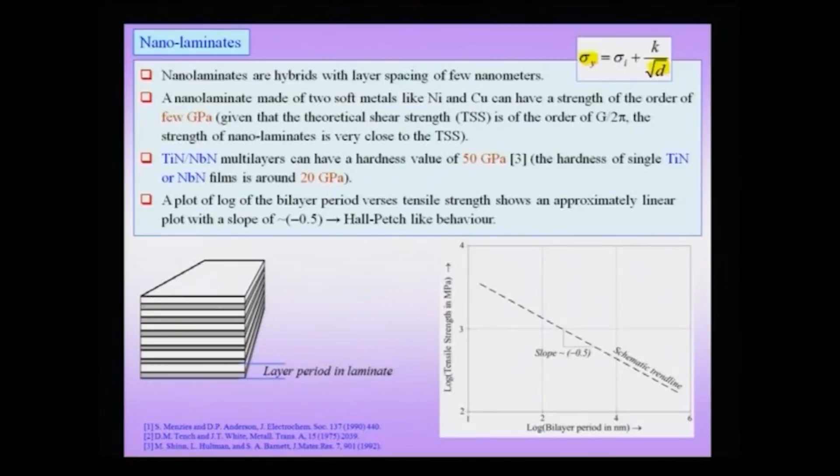One of the common models used to understand this Hall-Petch effect is known as the dislocation pile-up model. We had also noted that though this is a popular model, electron microscopic evidence is often not available in support of it, even though this kind of behavior is seen in a wide class of materials across large variations in grain size.

But we had also noted that when we go down to very small grain sizes, the Hall-Petch relationship breaks down, which is expected. We noted that below about 20 nanometer grain size, there could be a regime of altered strengthening with decreasing grain size. We could have no strengthening with decreasing grain size, or we could have what you might call an inverse Hall-Petch effect, which is an entirely new concept, especially relevant for nanocrystalline materials.

Now we will consider a hybrid, and explore the applicability of the Hall-Petch relationship in nanolaminates and particulate composites. Nanolaminates are hybrids with layer spacing of a few nanometers.

A schematic is shown below, in which you have two materials, and in the example considered, one material could be nickel, another could be copper. Of course, you could take a wide variety of materials. For instance, you could have a germanium layer followed by a germanium silicon solid solution layer, or a gallium arsenide layer and an indium gallium arsenide layer. Anyhow, you can form a bilayer, which is basically a 2D nanocrystal, and you can stack them one on top of the other to obtain a laminate structure.

The two layers could be coherent with each other, incoherent, or semi-coherent, and in the process you have a periodicity in the z direction. So this is my z direction. The important point to note is that this is my layer period, that is, this is my unit cell parameter along the z direction.

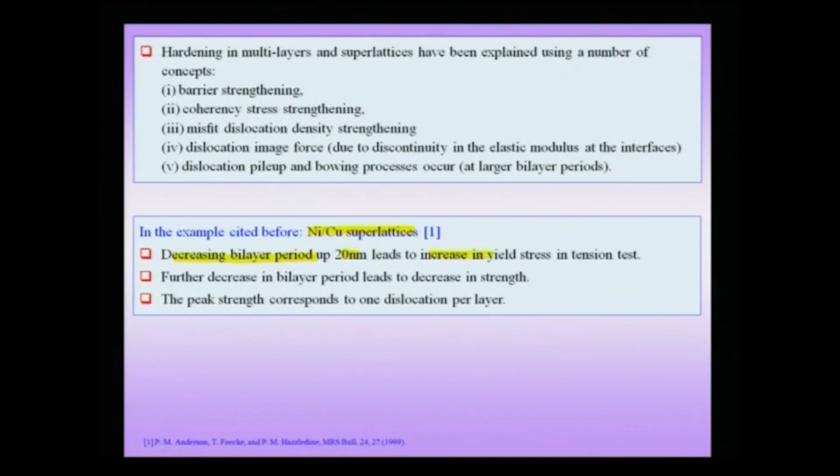This is a very interesting effect. If you dwell deeper on these nickel copper superlattices, you would notice that a decreasing bilayer period up to about 20 nanometers leads to an increase in the yield stress in the tension test. Further decrease in bilayer period leads to a decrease in strength. The peak strength corresponds to about one dislocation per layer.

So this linear trend is followed in a certain regime, as I pointed out, and would not be followed at a very small period. But the interesting thing is that the peak strength corresponds to about one dislocation per layer, and we will soon see what mechanism has been attributed to this kind of strengthening.

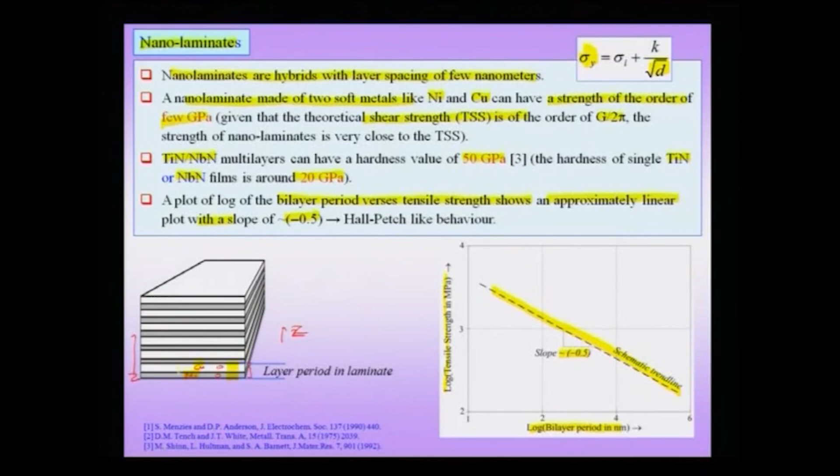To summarize this slide, we can not only have nanoscale materials, but nano hybrids, in which case the two components forming the composite or hybrid structure are both on the nanoscale. In this case, the individual layers of nickel and copper are on the nanoscale, and this kind of nano laminate shows very high strength even though it may be made of soft materials like nickel and copper, approaching almost the theoretical shear strength of the material.

That means the yield stress could be of the order of gigapascals, and additionally you also observe Hall-Petch kind of behavior in a certain grain size or bilayer period regime. Now, the hardening in such multilayers and superlattices has been explained using a number of concepts.

We just list them here, we do not go into the details of some of these, because some are still debated as to which is the correct or dominant mechanism in one kind of system versus the correct mechanism in another system. But we list some of these and may make a few additional comments.

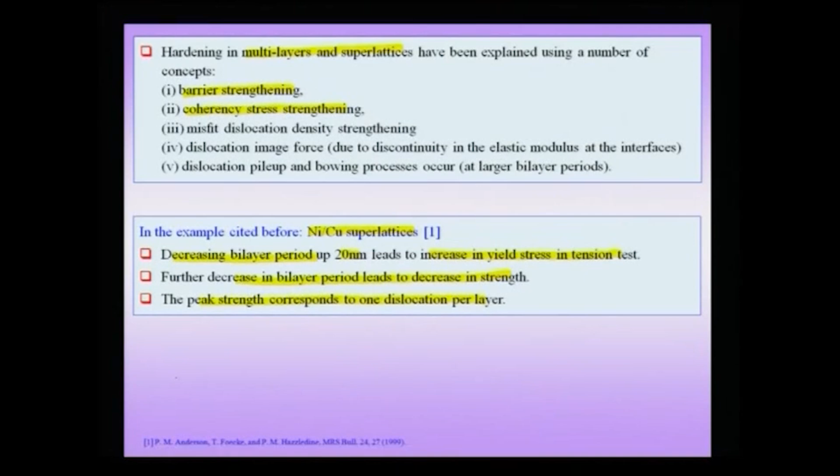They talk about increased barrier strengthening, which gives rise to this kind of extraordinary strength at the nanoscale. There is expected to be some kind of coherency between the two layers. Suppose I am talking about two layers, this is my layer A and this is my layer B.

So it is expected that this interface between layer A and layer B could be a coherent interface. That means there is an epitaxial relationship between the A and B layers, which gives rise to certain coherency stresses, and these coherency stresses are going to modify your local stress state, which is coming from an externally applied shear stress or a tensile stress.

It is also assumed that if this bilayer period becomes large, and if you start with what you might call a coherent system, then it will no longer remain coherent for large thickness, and in fact you may obtain misfit dislocations decorating the interface. So typically you could have certain decoration of misfit dislocations along the interfaces, which implies that the system is partially coherent, and this misfit dislocation would impede the motion, and this misfit dislocation, as we have noted before, is a structural dislocation.

It is not a statistically stored dislocation in the bulk of the crystal, and such a misfit dislocation would tend to give rise to certain hardening effect, which could attribute to the additional hardness of such a material in the nanoscale. Additionally, there is the concept of the dislocation image force, which we have encountered before, and this is due to the discontinuity in the elastic modulus at the interfaces.

A few words may be necessary here, because this is not the classical image force, because in the classical image force we have noted before that you have a free surface and there is a force which is an attractive force towards the free surface.

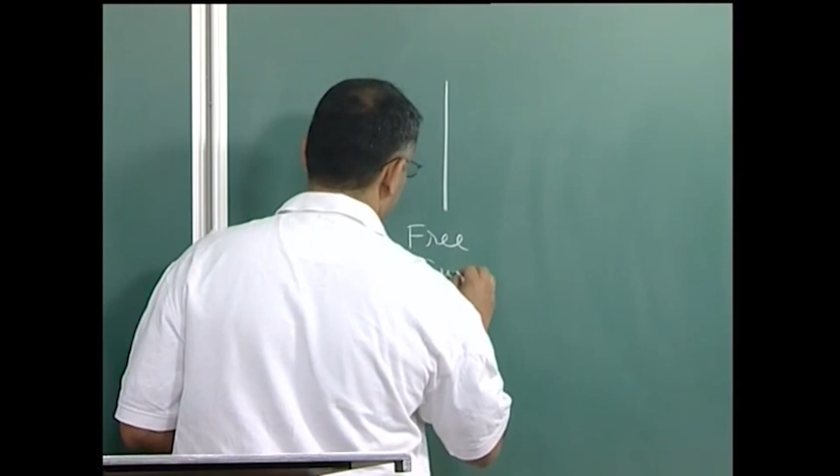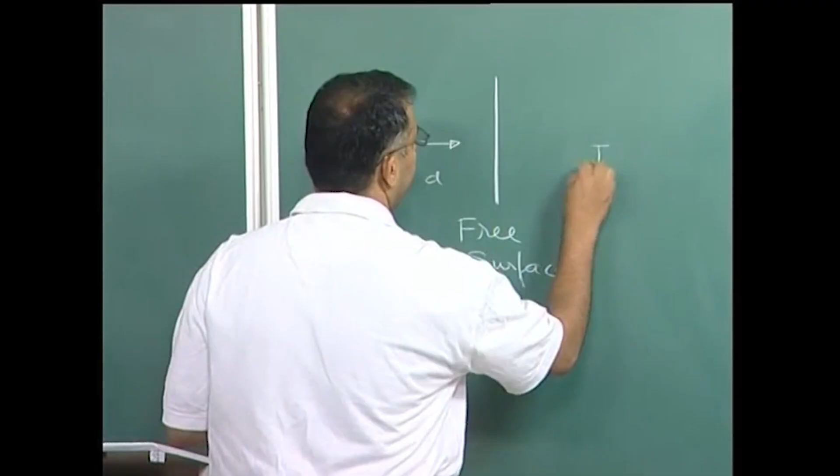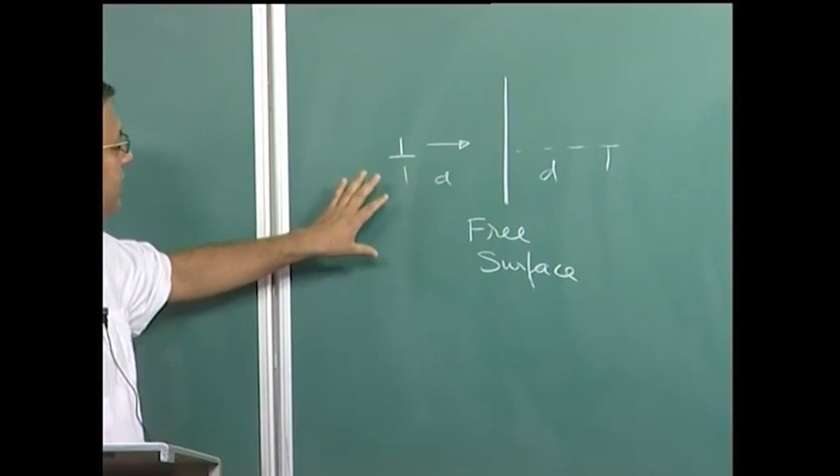Now, we can extend this concept of an image force. In this case, of course, I can make an image construction, and therefore, the attractive force between the two is called the image force, but I can extend this, and this kind of a force is called a configurational force, because this is coming not because of an individual mass particle being attracted to an individual mass particle, but because of the configuration of the entire system.

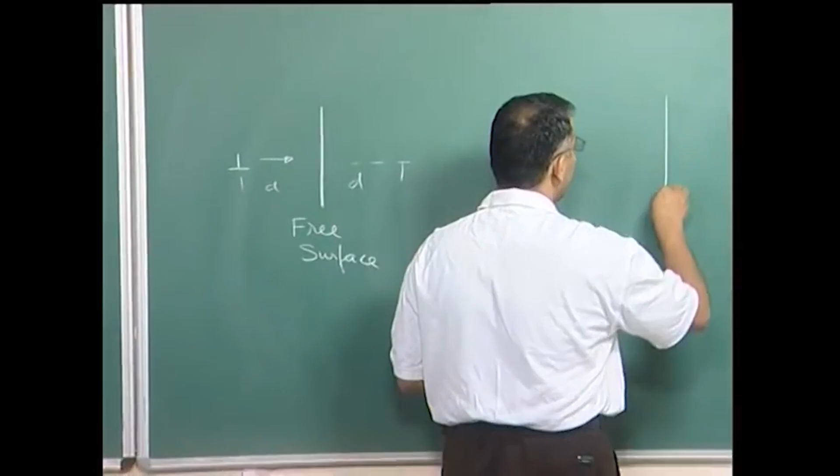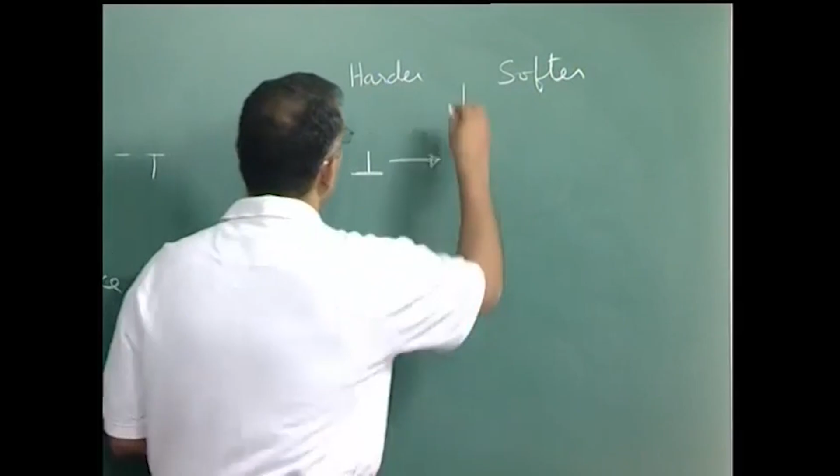And such a configurational force can also exist between, for instance, a harder material and a softer material. And if I put a dislocation in a harder material, it will be attracted towards the softer material, and here I am talking about elastically harder or softer.

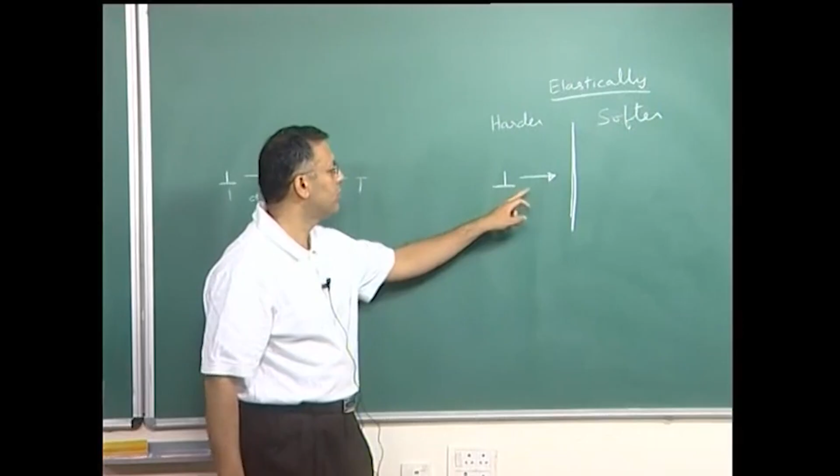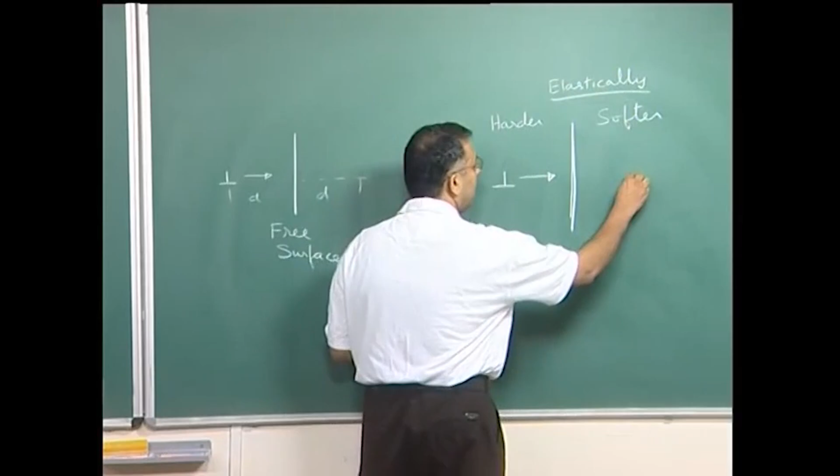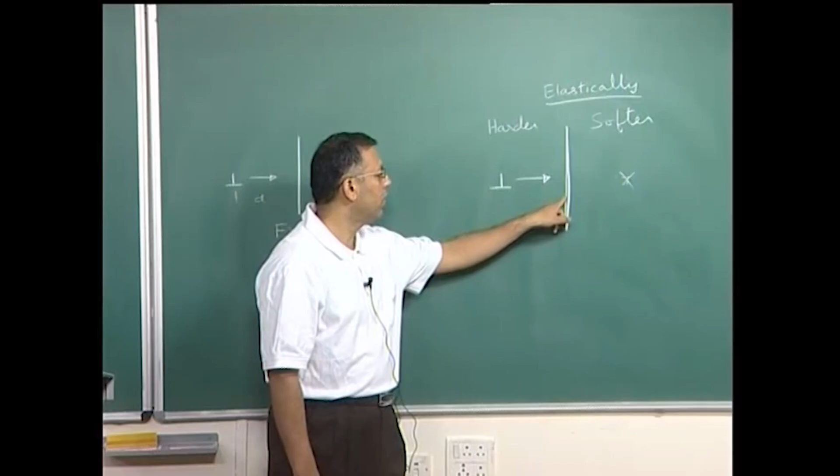So, if I have a harder material and the dislocation sits in the harder material and there is an interface with a softer material, then the dislocation may feel a force towards the softer material, and this kind of configurational force can loosely be called an image force, even though we should understand that actually now I cannot have an image construction, because this is not valid anymore, this is not a free surface, this is a softer material. Nevertheless, the dislocation will feel a configurational force towards a softer interface, because now the energy of the system would tend to decrease as the dislocation is positioned closer and closer to the softer material.

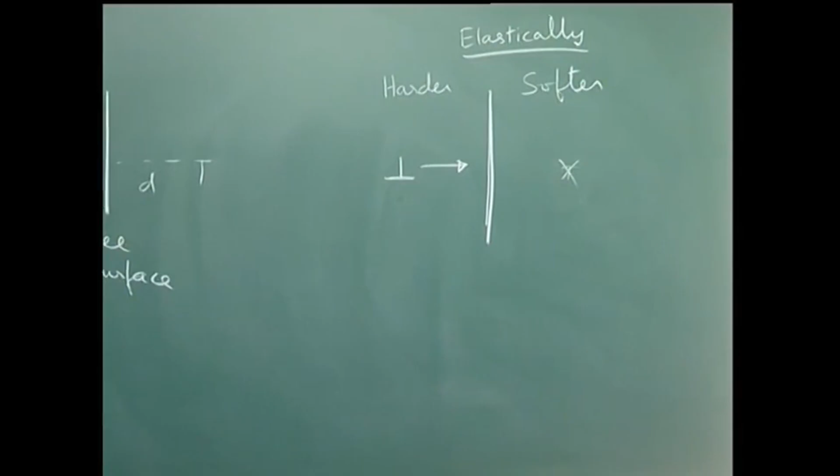That means that such kind of effects also seem to play an important role in the strengthening of these bilayers, and they have also been attributed to give some additional effect to the hardening, which is seen in these bilayers, which we have seen approaches almost the theoretical shear strength of the material.

And additionally, of course, some common mechanisms which are observed in the case of large grain size materials, like dislocation pileup and bowing of dislocation, which is like the Orowan bowing, are also observed, but now we have to note that this can only occur at larger bilayer periods.

That means that in smaller bilayer periods, we already noted that there is not enough space for a mechanism like a Frank-Read mechanism or an Orowan bowing mechanism to operate, and we have already seen that when you talk about a really small periodicity, then the whole region can only support one dislocation per layer. That means it is not possible to put multiple dislocations - of course, when I am talking about multiple dislocations, I am talking in the thickness direction.

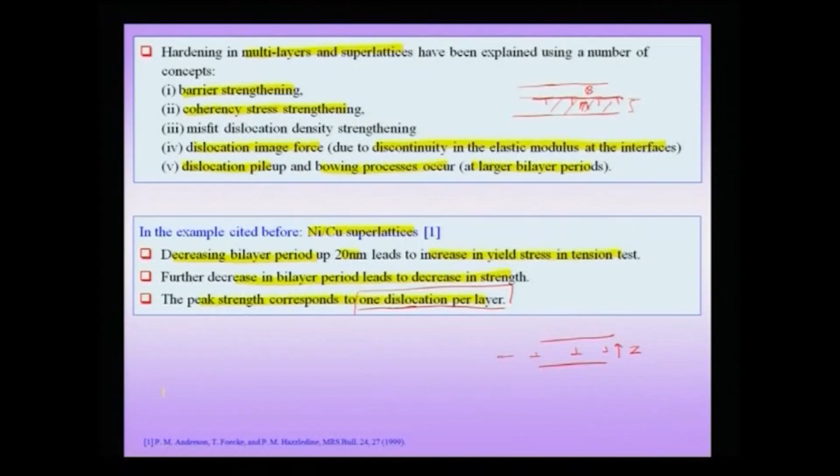So, there could be many dislocations, and I am schematically showing here in the direction of x or y, but in the z direction, which is perpendicular, or the direction of periodicity of the laminate, you do not expect more than one dislocation. And you could have even smaller sizes when the system becomes completely dislocation free - in other words, no dislocations are supported in the bulk of the two crystals which make up the superlattice.

So, we see that in nanolaminates we can obtain very high strength, and to understand this, we have to invoke a mechanism which is now thickness dependent, not independent of thickness. Therefore, if you go from larger bilayer periods to smaller bilayer periods, the mechanism may switch from a normal dislocation pileup or bowing mechanism to other kinds of mechanisms which are operative, like we just now saw, the image force mechanisms, etc., at very small bilayer periods.

Like we make a nanocomposite as a laminate composite, we can also make nanocomposites the usual way, which is the particulate nanocomposites. And herein also we see a lot of beneficial effects of putting nanoparticles in a bulk matrix. That means the relevant nano entity in this whole system is the reinforcement.

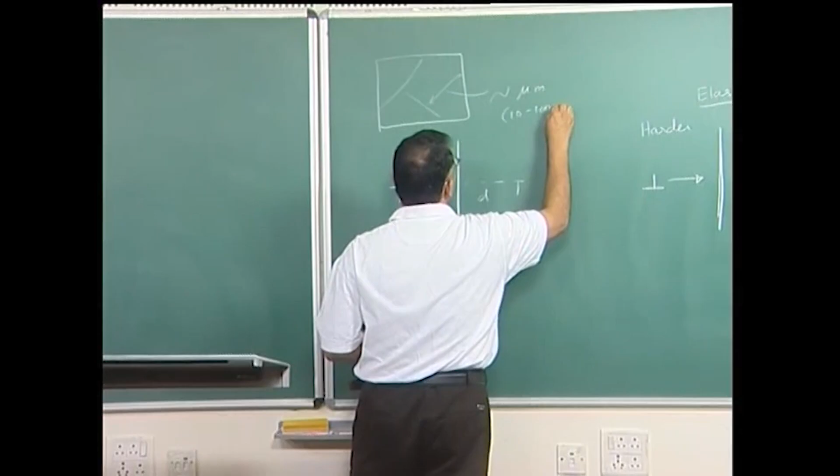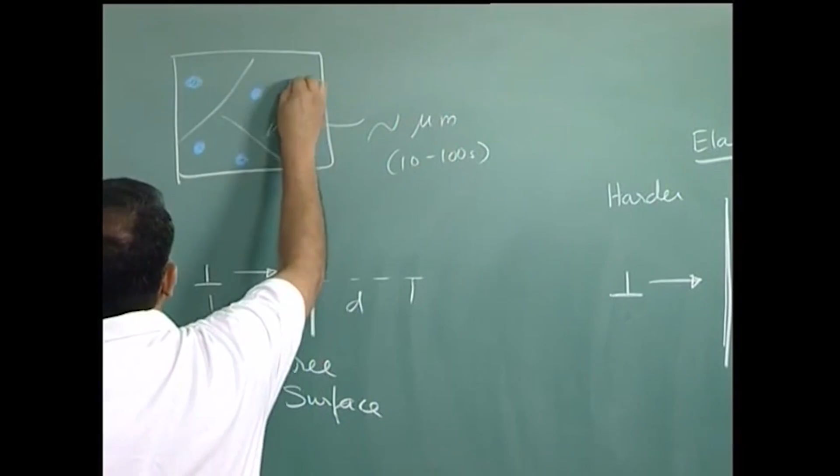That means I could actually have a polycrystalline material, and the grain size of this polycrystalline material could be in the micron scale, or tens or even hundreds of microns. That means this is not the relevant nanoscale dimension, but then I could put particles inside here which are used as reinforcement. For now I will draw schematically these particles as spherical, though there is no reason to believe they have to be spherical, and these particles could also be precipitates.

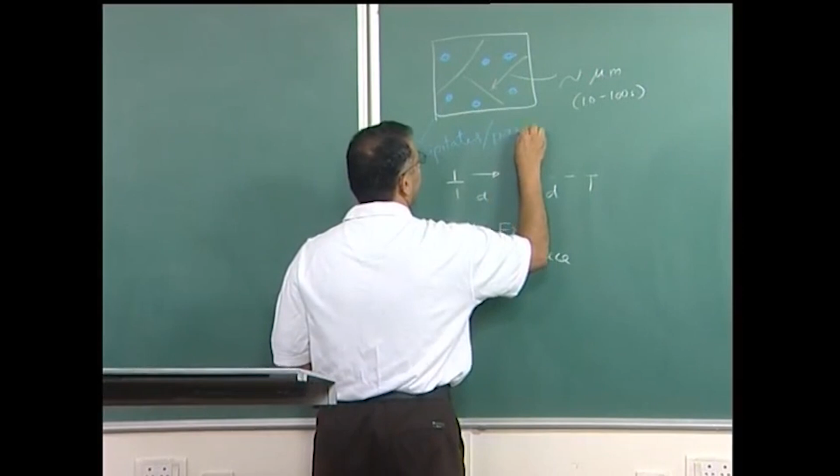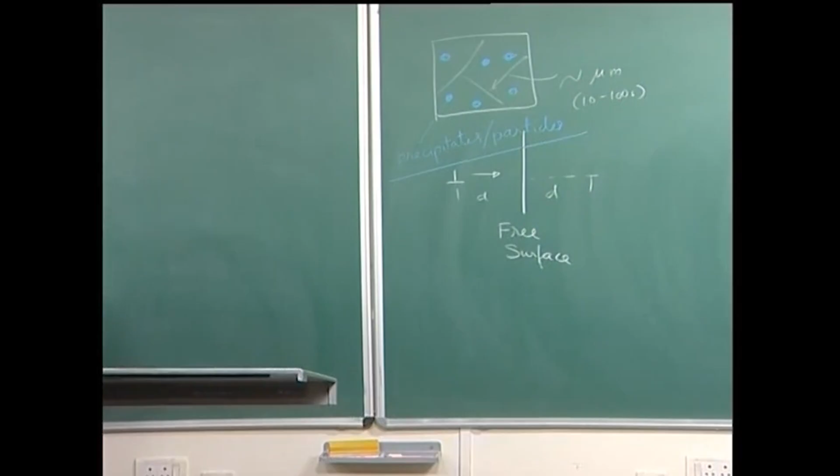This nanoscale dispersion of the second phase in a bulk first phase can actually give rise to a tremendous increase in strength, as shown in some of these examples here. We have already talked in detail about the precipitation hardening system, wherein you have precipitates of the scale of 1 to about 100 nanometers, and we will not repeat it here, but which is the case of duralumin, a precipitation hardening system.

But we will take up other examples like nano sized molybdenum in a volume fraction about 5 to 20%, which is from the usual small volume fraction to a reasonable volume fraction, when it is dispersed in a micrometer grain sized alumina. That means the grain size of alumina is no longer the nanoscale, it is only the molybdenum reinforcement which is in the nanoscale.

There is considerable improvement in hardness, fracture strength and toughness. So you see that the properties are overall enhanced by putting nano sized molybdenum in alumina, and you know that alumina is a ceramic, that means it is prone to brittle fracture and its fracture toughness is expected to be small. Therefore, there is a tremendous reason to add these kind of particles which will give you an increase in fracture strength and also an increase in toughness, toughness being the energy absorbed before fracture takes place.

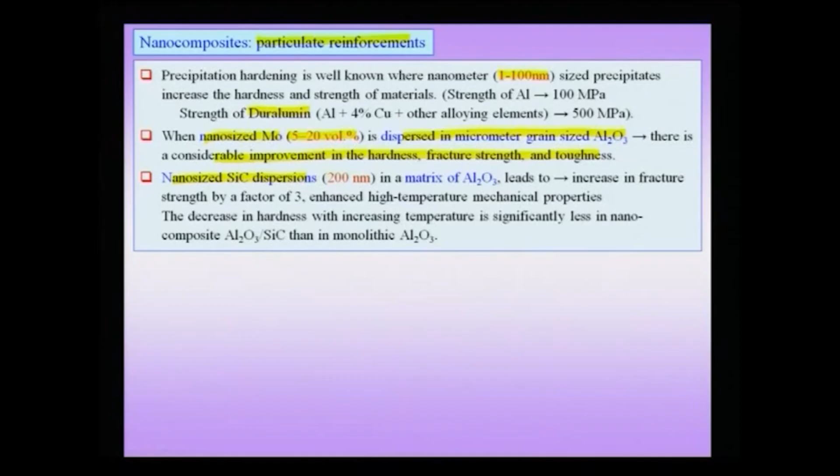Nano size silicon carbide dispersions, again we are talking about silicon carbide in the nanoscale of about 200 nanometers, in the same alumina matrix, also leads to an increase in fracture strength by a factor of 3. This is very important, because alumina, being a ceramic, being an oxide, is in a stable state. So it is resistant to some of those usual things which metals are not resistant to, like corrosion, etc., and it has a good elastic modulus as well.

But the problem with ceramics, as you know, is that they are very intolerant to cracks. In other words, they have a poor fracture toughness. So by adding silicon carbide dispersions in the nanoscale, you can get an increase in fracture strength of about a factor of 3, which is a pretty good increase.

The high temperature mechanical properties are also pretty good, and you know typically these ceramics find applications in high temperature, and this would be a good thing to add, actually, silicon carbide. The decrease in hardness with increasing temperature is what you expect, because now you can have thermally activated motion of dislocations. In other words, in normal alumina at room temperature, the strength is very high because dislocations are not that glissile, the Peierls stress is very large.

But then when you go to high temperature, some of these will start showing plasticity, because now you can have thermally activated slip, and also other mechanisms like grain boundary sliding may start to take place. Therefore, this softening effect is significantly reduced when you use an alumina silicon carbide composite rather than a monolithic alumina.

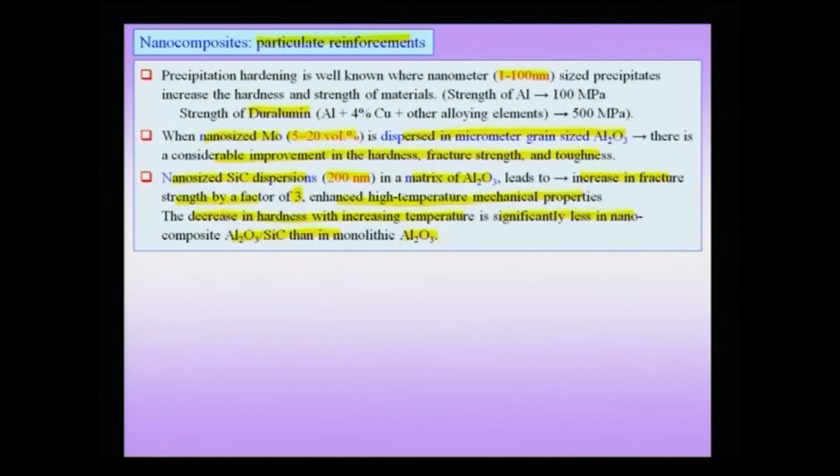That means you have benefits on all fronts: benefit in fracture toughness, benefits in high temperature strength, and also in the case of molybdenum in alumina, you actually have an increase in hardness and toughness as well. Therefore, it makes sense now to actually make some of these composites with reinforcements in the nanoscale.

And we have already seen one example wherein carbon nanotubes has been used for reinforcement of alumina, and we have seen that typically these are multi-wall carbon nanotubes, and by doing so you can actually get a benefit in strength there as well.

So, to summarize these slides, we have of course individual nanostructures which themselves show very good properties, but then we also have composites and hybrids wherein at least one relevant entity is in the nanoscale, which can also give us improvement in the properties.

Next, we take up the issue of creep in nanomaterials. We had earlier talked about creep as a general phenomenon, and we had also talked about various kinds of creep mechanisms, and issues which will be highlighted when we go down to the nanoscale. We said that some of these mechanisms, like diffusional mechanisms and issues like climb, when you go to nanoscale, all these effects will be enhanced, and therefore you would expect creep rates to be high.

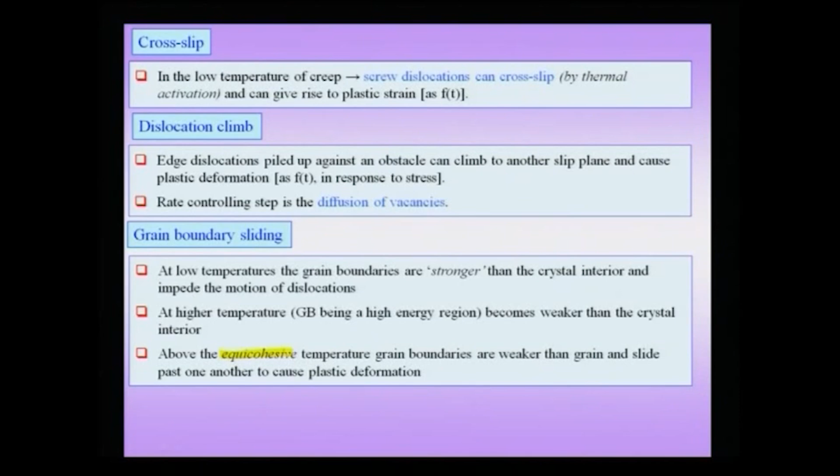Additionally, one of the important mechanisms of creep is grain boundary sliding, and we noted that for grain boundary sliding, in some sense we have to cross the equicohesive temperature. Decreasing the grain size in some sense is like increasing the temperature, and therefore even at low temperature we would expect an increased creep rate. That means we noted that we would expect in nanomaterials high creep rates, and that too at lower temperature. So this is what we had expected, we had anticipated.

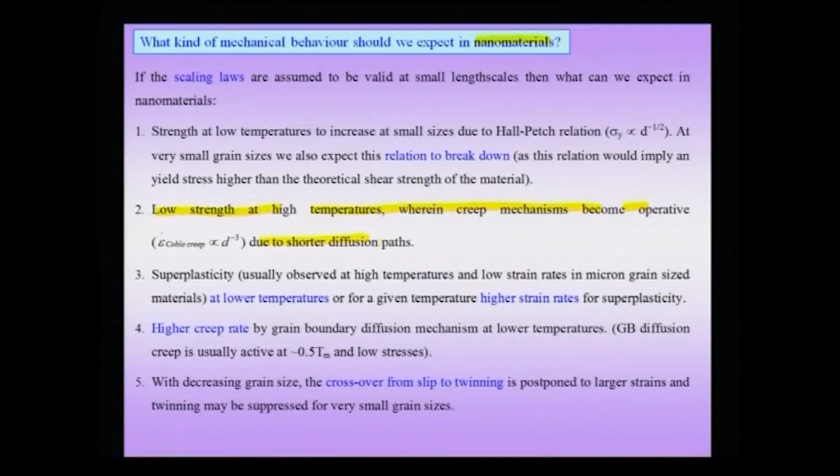Now we will actually see how much of this is actually true when talking about creep of nanomaterials. We will see that in some systems we do see what our expectations were, but in many other systems we not only do not see what our expectations were, but we can even see effects opposite to what we had expected.

If you talk about two important systems like nanocrystalline palladium and copper, which have been pretty well investigated, you can clearly see in these cases the grain size is of the order of 40 or 20 nanometers, which is extremely small. In this system there seemed to be no increase in creep rate as compared to the micron sized counterparts. So this is pretty startling, that we did expect increased creep rate when you go down to nano sizes, but there was no increased creep rate.

Of course, when comparing nano and micron sized grain, we are using the same temperature for the comparisons. And more surprisingly, in some temperature regimes, even a lower creep rate was observed in the case of palladium. So this is in direct contradiction of our expectations, wherein we thought there is going to be enhanced creep rate, and therefore this is extremely surprising in the case of nanocrystalline materials and the creep behavior.

Studies on copper involved a small distribution of grain size, 10 to 25 nanometers, and palladium about 35 to 55 nanometers, where 40 nanometers can be thought of as an average in that regime. That means, at the heart of the mechanisms, we have to keep in mind that though there might be an average grain size reported in literature, there is always a spread in grain sizes, and the more statistical data we get, the better we find out the true distribution of grain size.

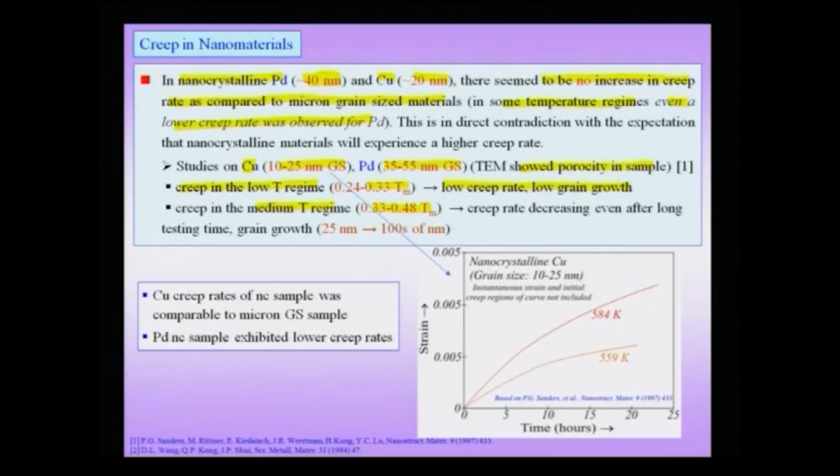The creep study was done in two temperature regimes: one in the low temperature regime of about 0.24 to 0.33 Tm, and one in the medium temperature regime, about 0.33 to 0.5 Tm. In the low temperature case, there was low creep rate and low grain growth. In the medium temperature regime, the creep rate was decreasing even after a long testing time, and more importantly, there was grain growth. That means if I have grain growth, I am essentially changing the microstructure of the sample.

Here we are not talking about a small grain growth, we are talking about a grain growth wherein the grain size increased by a factor of 4 or more, and this is the average grain size, which implies that the microstructure is continuously changing. Maybe there is also porosity in the sample which is increasing, and therefore it is difficult to characterize creep in many nanocrystalline materials, because I cannot understand if this decreased creep rate is occurring because of the nanocrystalline effect, or because of the increase in grain size taking place during testing.

These are very serious issues associated with creep testing in materials, since we often see porosity, often we see a lot of grain growth, and therefore it is difficult to separate out the effect coming purely from the nano sized grains versus the changing structural parameters as the test is being conducted.

Below is shown, for instance, the studies on this copper material, which has a grain size in the range of about 10 to 25 nanometers, and in this plot we have the instantaneous strain, which is the elastic strain, initially removed, and the initial creep regions of the curve are also excluded.

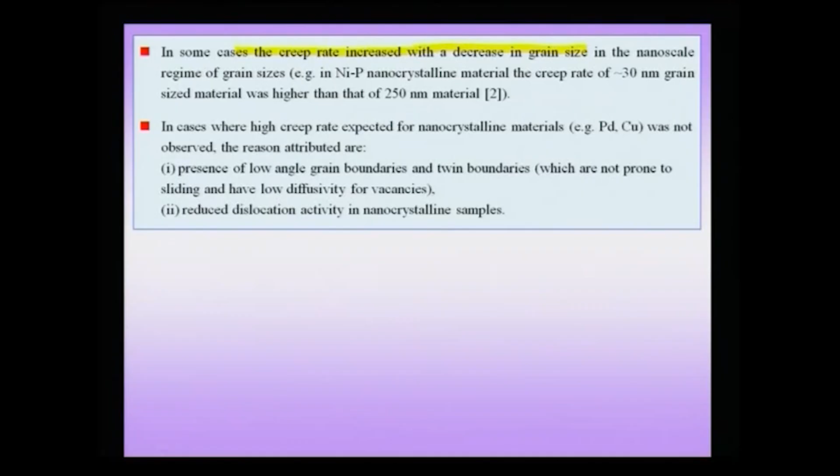This was an alloy of nickel and phosphorus. The creep rate of the 30 nanometer grain size material was higher than the 250 nanometer grain size material. That means, by decreasing the grain size—both grain sizes being in the nanoscale, one 250 nanometers and one 30 nanometers—there is an increase in the creep rate. So we have seen that all three possibilities exist on reduction of the grain size.

Of course, the comparisons are slightly different, because in the first case, for copper, we had compared the nano grain size with a micron grain size sample. Here we are comparing two nanometer grain size samples, and we see that there is actually an increase in creep rate as we decrease the grain size.

In cases where a high creep rate was expected for nanocrystalline materials, like we see for palladium and copper, which are nice metallic materials where the diffusion rate is high, this was not observed. The reasons are typically attributed to the presence of low angle grain boundaries and twin boundaries.

These low angle grain boundaries are, as you know, low energy configurations, and typically, by the Read-Shockley model, they are decorated by structural dislocations which accommodate the misorientation. These are not prone to sliding and have a low diffusivity for vacancies.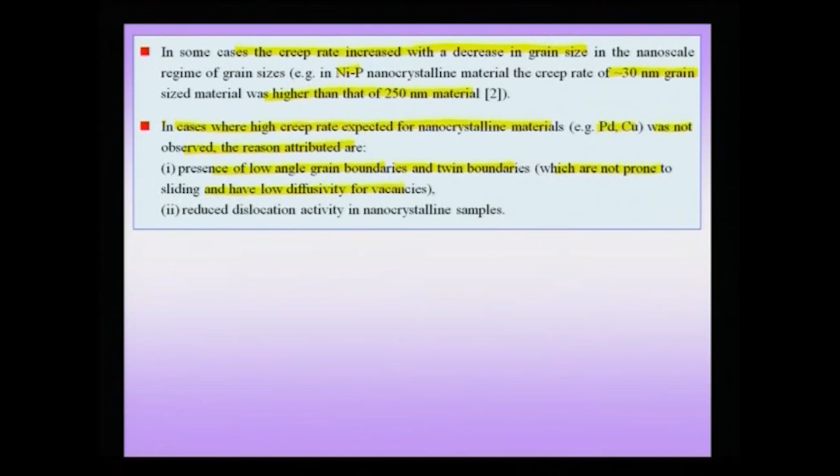Therefore, because there is a predominance of these low angle grain boundaries, this is the theoretical basis for understanding why such a material, in spite of being in the nanoscale, does not show a high creep rate. Additionally, low dislocation activity is also attributed to this low creep rate.

We had seen that even when there is grain boundary sliding, two other factors often come into the picture: one is dislocation activity, another is diffusion. Because if you have just grain boundary sliding, you will have triple junction cracks, and these triple junction cracks have to be healed by diffusion, and often have to otherwise be healed out by plastic deformation, which involves dislocation activity.

To summarize these two slides on creep of nanomaterials, we have cases where there is a decrease in creep rate on decreasing size. There are cases where there is not much difference to be talked about, but there are also cases where there is an increased creep rate on decreasing the grain size.

One nice example where an increased creep rate with decreasing grain size was seen is in nanocrystalline nickel, and these are room temperature studies.

This is very interesting, because this is close to the expectation we had earlier raised, that we would have higher creep rate under two conditions, perhaps under higher strain rate and at lower temperatures. Here the temperature is at room temperature, and we are making comparisons of grain sizes in the extremely small regime, of the order of 6 nanometer, 20 nanometer and 40 nanometer.

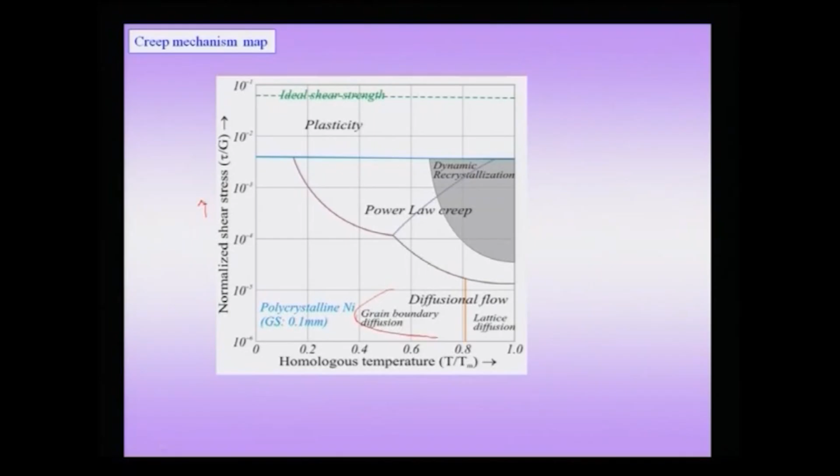We had noted some of these regions in the creep mechanism map we had seen earlier. In that map, it is usually in the higher stress region, on this axis, that you tend to observe dislocation creep, and in the low stress region you tend to observe diffusional creep. So this is the region of diffusional creep, and in the higher stress region you obtain dislocation creep. This is a very interesting study.

Again, we have to keep a few things in mind - when talking about 6 nanometer grain size, there is going to be a spread in the grain sizes, not just one number. But keeping other artifacts aside, this is a very interesting example where increased creep rate has been observed at room temperature, and the creep mechanism is consistent with our expectation of grain boundary sliding at low grain sizes. Nevertheless, despite 40 and 20 nanometers being small grain sizes, you see a switch in mechanism, especially at higher stress.

So we have all kinds of material here - pure palladium, pure copper, alloys like nickel phosphorus nanocrystalline material, and also nickel. Each one of these, though some are very similar, like nickel and copper being FCC materials, shows a very wide variety of behavior in nanoscale materials.

As far as the understanding goes today, there is no generalized principle we can apply to understand creep of nanomaterials, though we do understand some of the mechanisms that operate at larger grain sizes and those that operate at smaller grain sizes.

We had made a lot of observations regarding superplasticity in nanomaterials, and we had also noted previously that superplasticity in some sense is a very closely related phenomenon to creep, except that in superplasticity damage accumulation does not lead to failure. Therefore you are able to get very long tensile elongations of the order of 350% to 2000%, and this gives us a beautiful mechanism for superplastic deformation where we can obtain nice shapes, making it a nice production method.

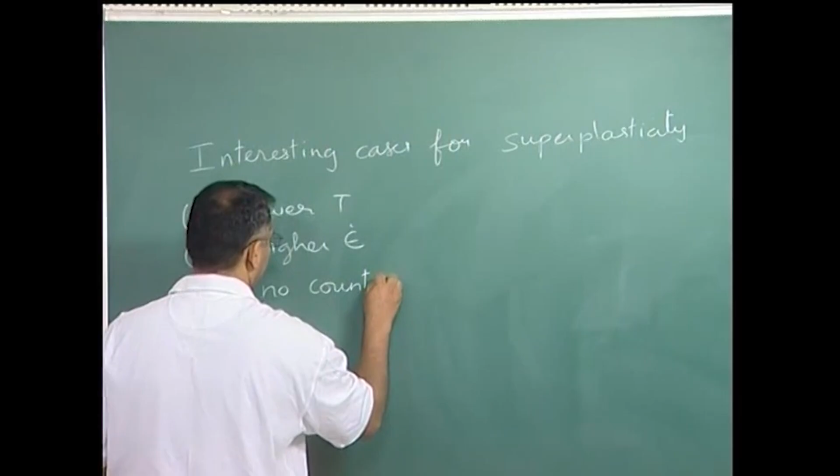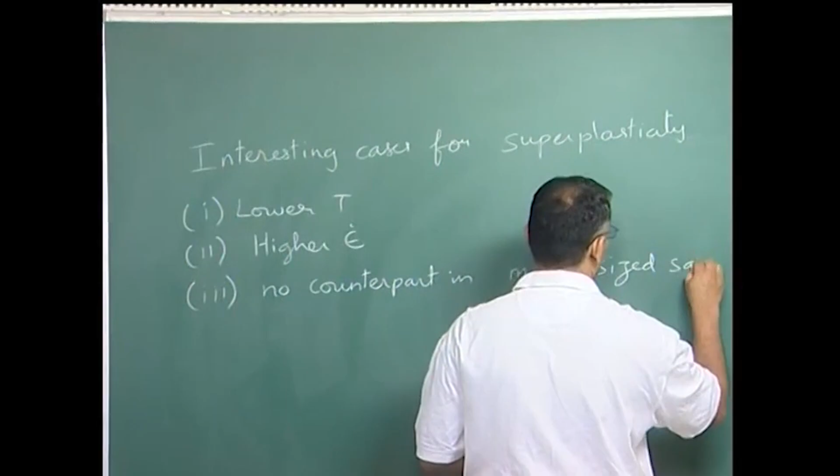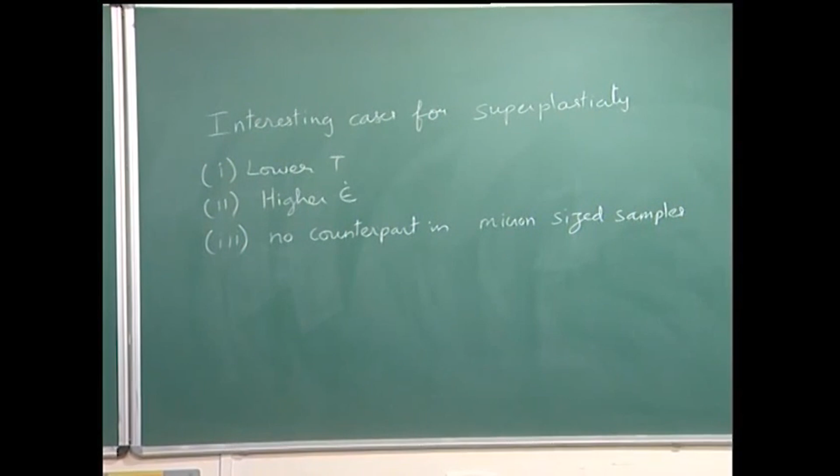So we will take up a few examples to see some of these interesting cases that exist when talking about superplasticity in nanomaterials. The first one is nickel, wherein the 20 nanometer grain size sample showed superplasticity more than 450 degrees lower than that for the micron grain sized or larger grain sized bulk counterpart. This is very, very interesting.

So if you observe superplasticity in these cases, it is actually very surprising, and the 50 nanometer grain size nanocrystalline Ni3Al became superplastic 450 degrees below its microcrystalline counterpart. This is again very beneficial, since Ni3Al is a technologically important intermetallic. If I am able to superplastically form Ni3Al 450 degrees below its microcrystalline counterpart, I have very important industrial applications for the nanocrystalline sample.

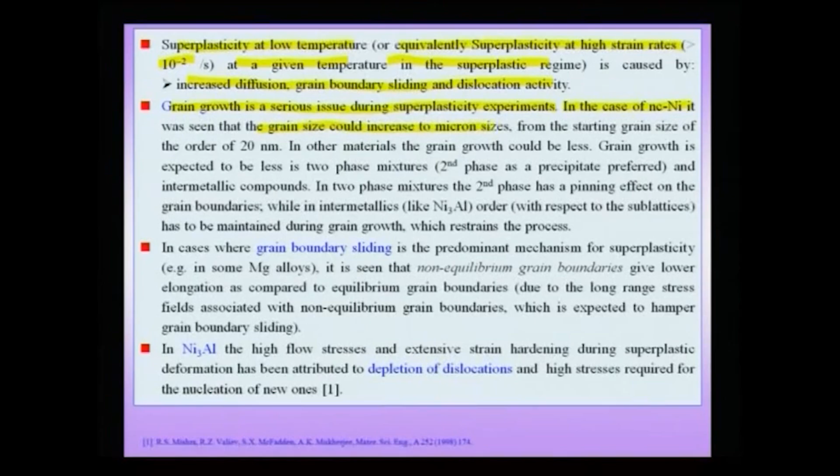Like in the case of creep, grain growth seems a very serious issue during superplasticity experiments. If grain growth is going to take place and if your expected superplasticity mechanism is grain boundary sliding, then obviously the elongations you are going to get will be limited purely because of grain growth issues. In the case of nanocrystalline nickel, it was seen that the grain size could increase to micron sizes starting from a grain size of order 20 nanometers. This is happening during the testing, meaning during superplastic forming, the grain size is increasing from about 20 nanometers to something of the micron size, which is a very serious issue in superplastic testing.

This means that even though my initial material had the ability to deform to a large extent, during the test itself the grain growth would reduce my overall available ductility. In other materials the grain growth could be less. This was a very drastic example in the case of nanocrystalline nickel, but in other experiments it was not necessary that the same kind of grain growth was the issue, though nevertheless grain growth could have taken place.

You always expect that grain growth is going to be less in a two phase mixture if the second phase is especially a precipitate, or they are intermetallic compounds, because intermetallic compounds are very hard and the grain boundary is less glissile. In a two phase mixture, the second phase has a pinning effect on the grain boundaries, while in intermetallics like Ni3Al, order has to be maintained as grain growth takes place. This means that if I really want superplasticity while retaining my grain size, so that my final product has the same grain size as my initial starting testing sample, I have to either work with a two phase mixture where the second phase could be a precipitate, or a kind of dispersion which will impede grain growth.

My second phase will have a pinning effect on the grain boundary migration, leading to grain growth, or I need to work with the intermetallic wherein grain boundary migration is impeded by the fact that you have two sublattices or more. For instance, in Ni3Al, one sublattice is occupied by aluminum and the remaining three sublattices are occupied by nickel, and this sublattice structure has to be maintained, which means grain boundary motion becomes more difficult.

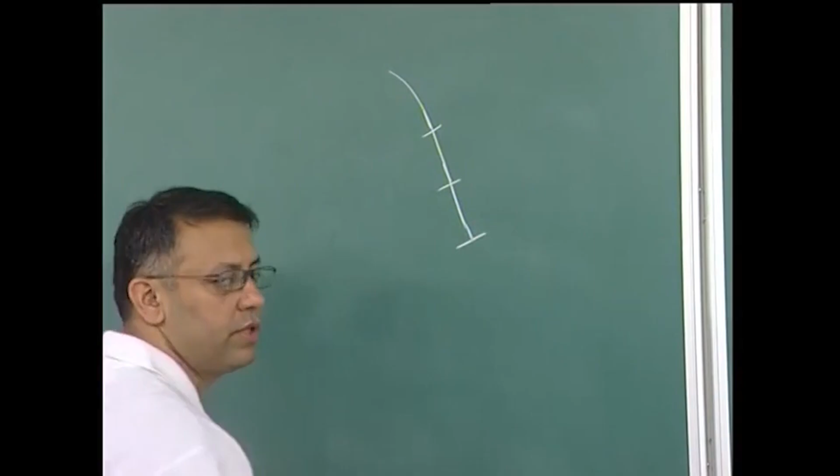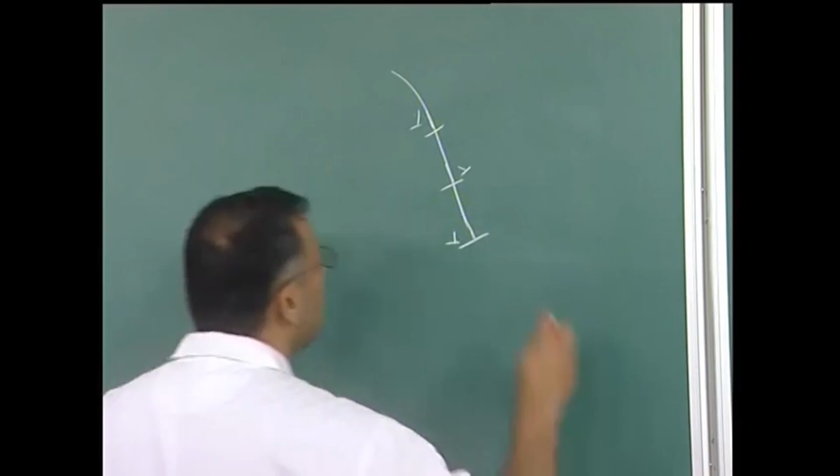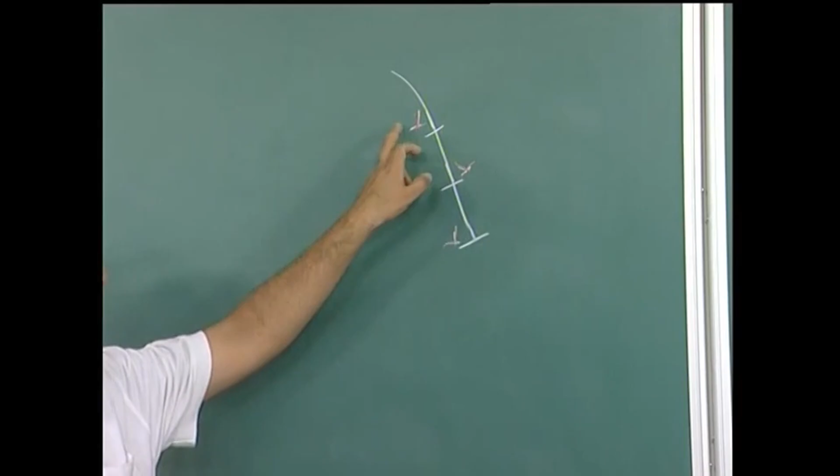So you have a grain boundary, and this grain boundary itself, by the Read-Shockley model, may have certain dislocations which are the interfacial or grain boundary dislocations. But in addition, this grain boundary may be associated with additional dislocations, which I am drawing in red. These additional dislocations give rise to a long range stress field, because this array of structural dislocations does not have a long range stress field, while these red dislocations do. Due to these long range stress fields, non-equilibrium grain boundaries are expected to hamper grain boundary sliding.

This is an issue where people have gone into details of the mechanisms of how grain boundary sliding takes place, and what kind of grain boundary gives easy sliding versus difficult sliding. It is seen that equilibrium grain boundaries slide easier compared to non-equilibrium grain boundaries, which are associated with a long range stress field.

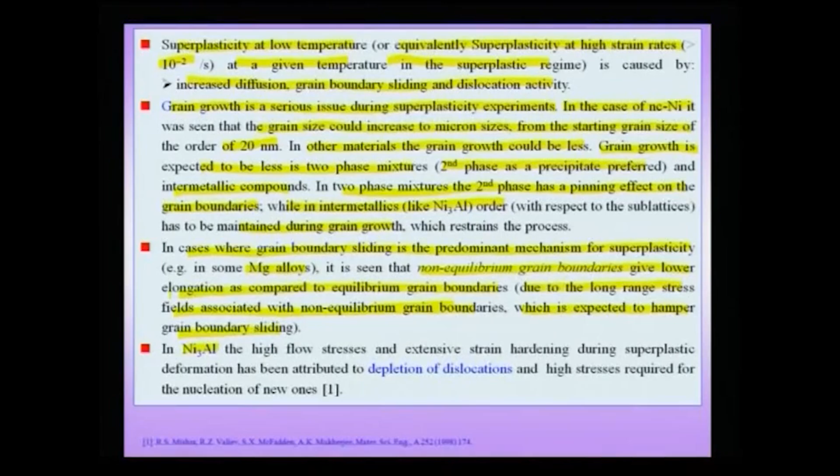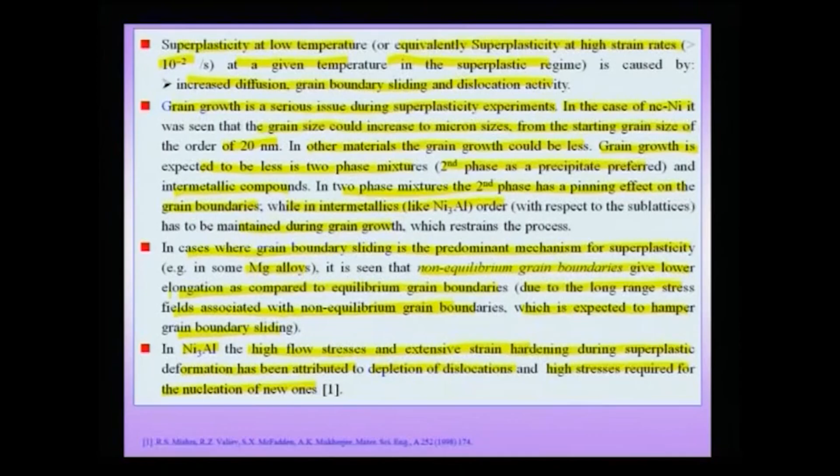In the case of Ni3Al, the high flow stress and extensive strain hardening during superplastic deformation has been attributed to depletion of dislocations and high stresses required for nucleation of new ones. We noticed when discussing the Ni3Al structure and its superplastic forming that superplastic deformation occurs in a 50 nanometer grain size sample. High flow stress is observed, and additionally there is extensive strain hardening during superplastic deformation, meaning that with progress in deformation the stress has to be increased - forming cannot take place at constant stress. This is attributed to depletion of dislocations and high stresses required for nucleation of new ones, which is the reason Ni3Al is difficult to form.

But we also have to note that since Ni3Al is an ordered structure, the dislocation structures, the kind of partials, and the kind of stacking faults involved are very different from those of a normal material like aluminum. For instance, Ni3Al would have something known as superlattice intrinsic stacking faults and superlattice extrinsic stacking faults, which are not observed in normal metallic counterparts.

Next we take up an important issue. We had a lot to say about a quantity known as the strain rate sensitivity. Let us go back and review our slides where we talked about this quantity. We said that we can do deformation at low temperatures or high temperatures, and by low temperatures we mean temperatures below the recrystallization temperature, about 0.5 Tm or less. We noted that at low temperatures, the relevant variable among the four important variables - stress, strain rate, and temperature - is strain.

At high temperature, unlike in a low temperature system where dislocation densities tend to increase and the system becomes a battery for energy—in other words, if you are spending X amount of energy, part of this energy is stored in the microstructure as increased point defect density and dislocation density, making it a battery.

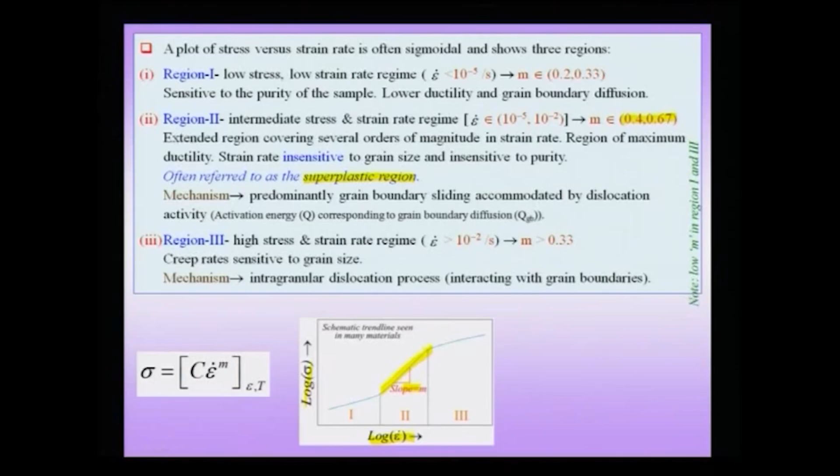At high temperatures, strain rate sensitivity becomes an important parameter. We noted that a high strain rate sensitivity typically indicates superplastic behavior, as seen in examples of superplastic deformation. The region with high strain rate sensitivity, between 0.4 and 0.67, is referred to as the superplastic regime in a log stress versus strain rate plot—this is where you get extensive superplastic deformation.

Now we will say a few more things about strain rate sensitivity, especially the difference in behavior between FCC and BCC materials.

So how does strain rate sensitivity change in nanocrystalline materials, especially as you change the grain size, as shown in the plots below? First let's go to the plots, and we will come back to the text soon.

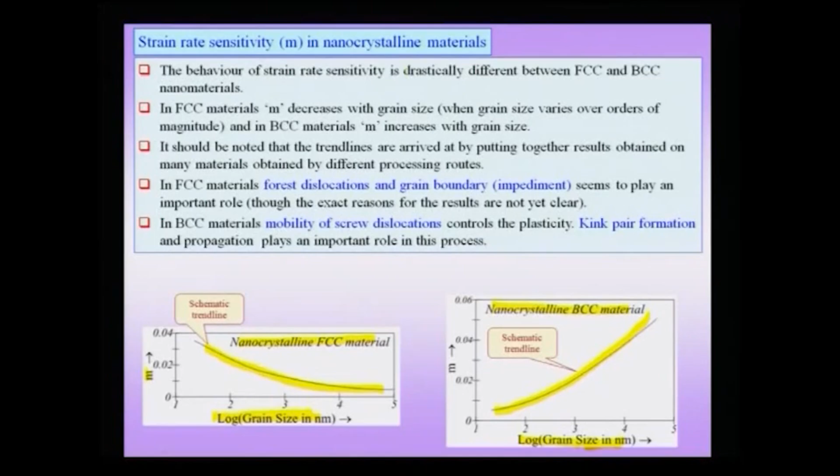If I plot strain rate sensitivity as a function of grain size in the nanoscale regime, plotting log of grain size, for FCC nanocrystalline materials the strain rate sensitivity decreases with increasing grain size. On the other hand, for nanocrystalline BCC material like iron, the strain rate sensitivity actually increases with increasing grain size. So the effects are exactly opposite for this important parameter when comparing nanocrystalline materials, implying the behavior of strain rate sensitivity is drastically different between FCC and BCC materials.

There is some understanding of this, which we will see soon, but the complete picture is not yet out. In FCC material, M decreases with grain size, and this grain size variation spans a few orders of magnitude; in BCC material, M increases with grain size, unlike in FCC materials.

You should note that these trend lines are not exactly followed for one material or one testing condition—they are arrived at by putting together results from many materials obtained through many different processing routes. We have already seen the important property differences that can arise from the processing route itself.

We had noticed, for instance, how different electrodeposited nickel can be in properties compared to powder-consolidated nickel. So processing route can play a profound role, a profound influence on properties, and therefore when we see such trend lines, we have to keep that in mind.

In FCC materials, our current understanding is that forest dislocations—a single dislocation cutting through a forest of other dislocations—and grain boundary impediment seem to play an important role, though the exact reasons for this strain rate sensitivity are not yet clear. We will not discuss that aspect further, but forest dislocation hardening and grain boundary impediment mechanisms seem important in FCC materials. In BCC materials on the other hand, mobility of screw dislocations seems to control the whole plasticity.

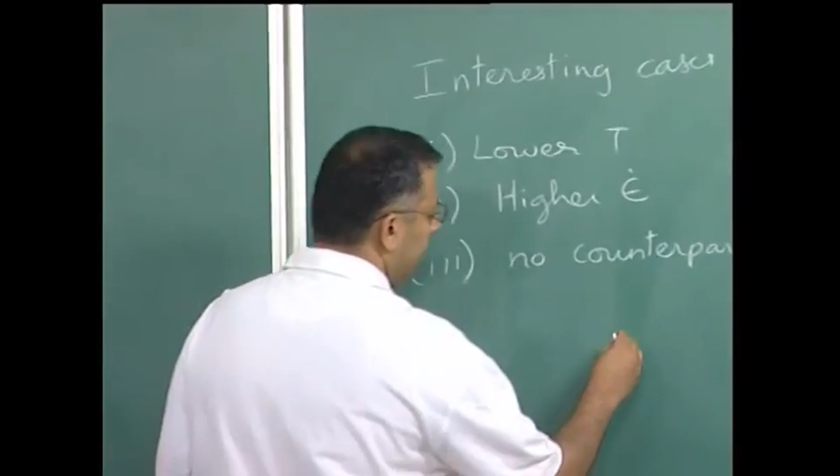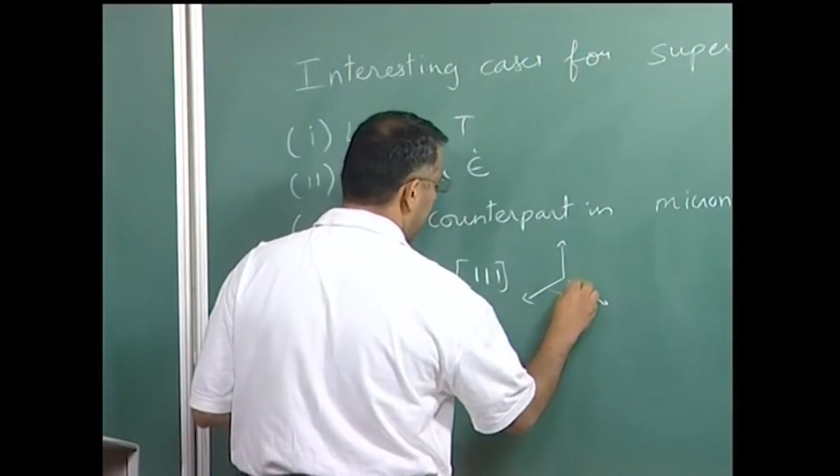As you know, the screw dislocation in BCC materials, the Burgers vector is along the 111 direction, and the screw dislocation splits, the core of the dislocation splits along 3 directions which are 120 degrees apart. This kind of splitting implies that for the screw dislocation to move, the core has to collapse and move to a new plane, and this implies that the Peierls stress for motion of screw dislocations is very large.

Therefore, if I am plastically deforming a sample having edge and screw components, the edge components would actually leave the crystal, which implies I will be left with more screw components in the material. This high Peierls stress implies that instead of the entire dislocation line moving, there is a mechanism known as the kink pair formation mechanism, and its propagation plays a very important role. I will briefly draw what is meant by this kink pair formation mechanism and its propagation to understand plastic deformation in BCC materials, which is also given as one of the important reasons for strain rate sensitivity.

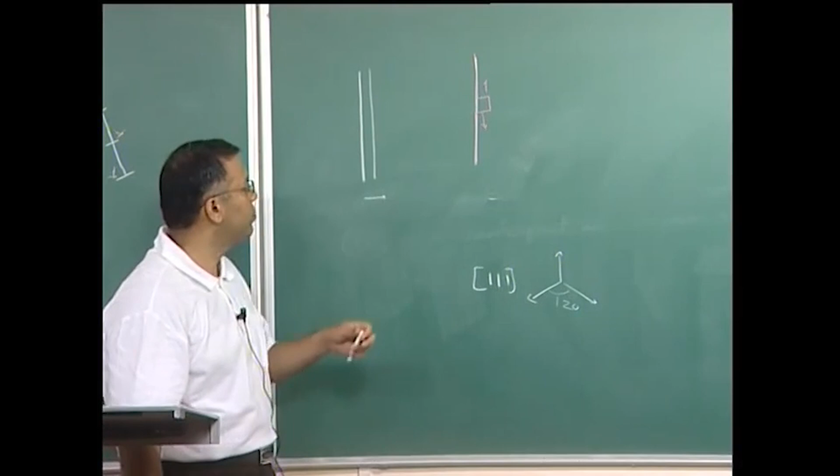So if I have a dislocation line, the entire dislocation line can move by a Burgers vector and come here. An alternate possibility is that this dislocation line may develop a kink pair - it can form a double kink like this, and then this double kink can propagate. That means the stress I need to apply is much smaller, because I am only propagating a small segment, not the entire dislocation by one Burgers vector. So this can actually propagate.

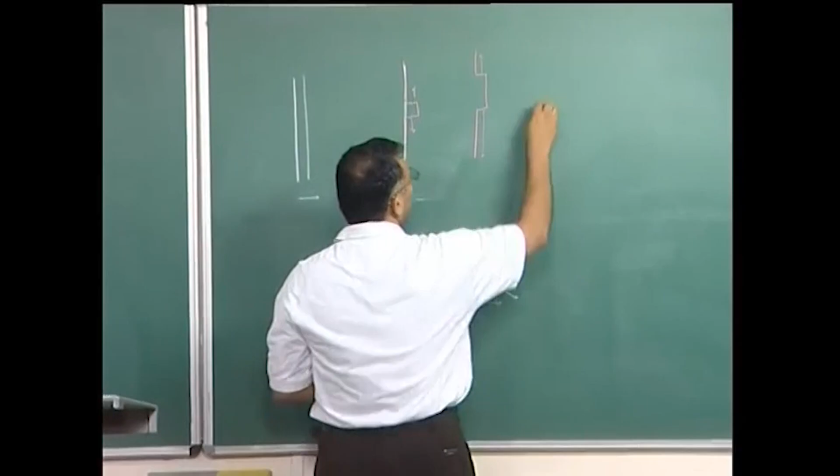And finally, when this segment would have moved to the top and this segment comes down to the bottom, I would have the motion of a dislocation stepped up by 1b.

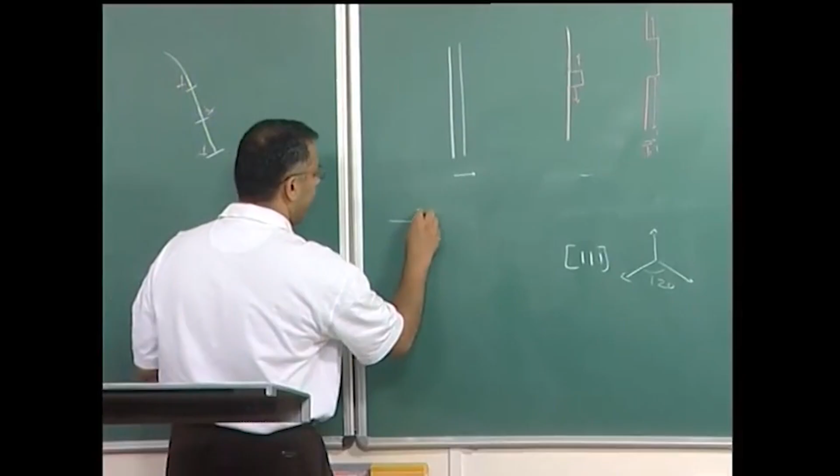Therefore, dislocation itself is a medium by which you can avoid the shearing of the entire crystal. You reduce the problem of shearing the entire crystal to small regions, and typically the analogy given is a fold in a carpet - you make a fold in a carpet and roll it, so instead of pulling the entire carpet, I make a fold and roll it down to get a little elongation, and I can make repeated folds to move the carpet.

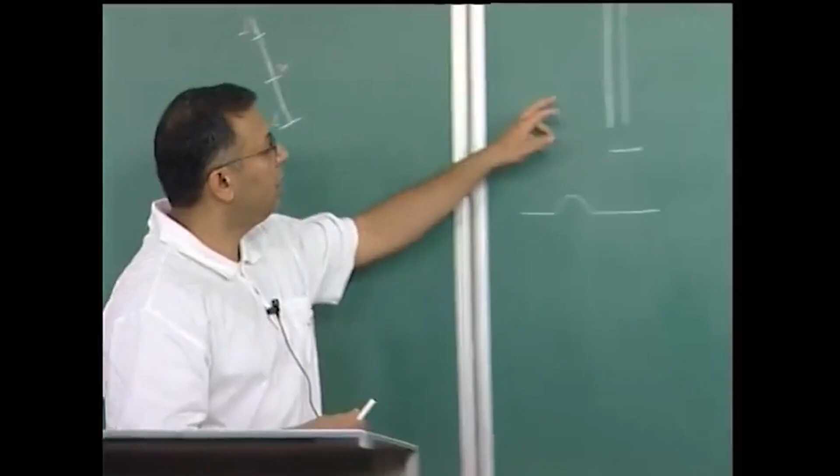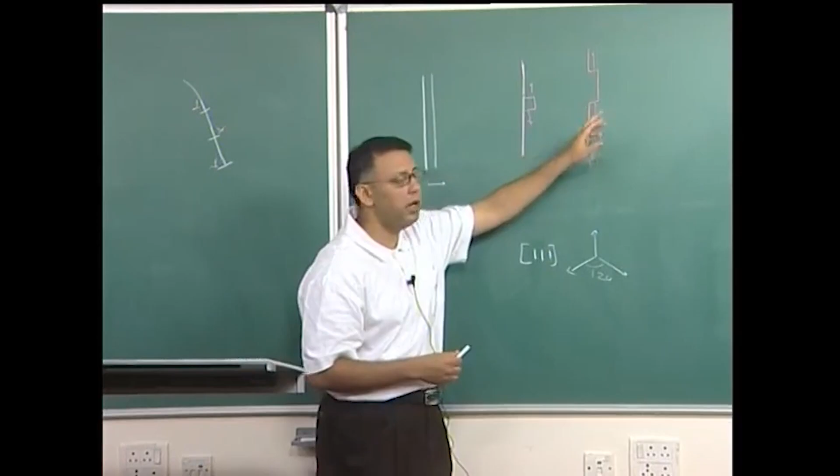This is the analogy given to understand how a dislocation weakens a crystal, but this is a second order effect, wherein the whole dislocation need not go by one single Burgers vector - you can nucleate a kink pair, and this kink pair can propagate orthogonal to the direction of motion of the dislocation, finally moving the dislocation. So I can have a second order mechanism operating which weakens my crystal.

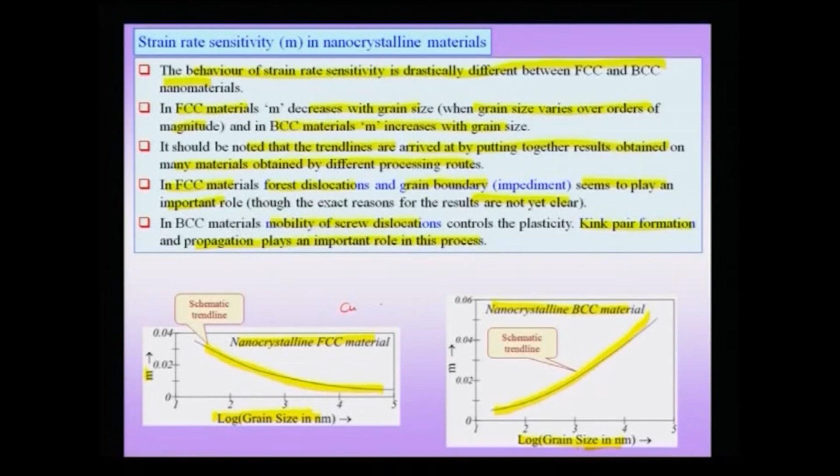Nevertheless, we need to keep these trend lines in mind, that we have exactly opposite trend lines when it comes to strain rate sensitivity of nanocrystalline materials - this could be a material like FCC copper, while this could be a material like BCC iron.

Additionally, a few more points to note are that deformation in nanostructured materials seems to occur predominantly by dislocation at interfaces and not bulk dislocations. This is for very small grain sizes of the order of about 30 nanometers - we are not talking about really large grain sizes of 100 nanometers and more, where you can have bulk dislocations, pileups, Orowan bowing, and Frank-Read mechanisms. But when you go to really small grain sizes, dislocations at interfaces play a very important role.

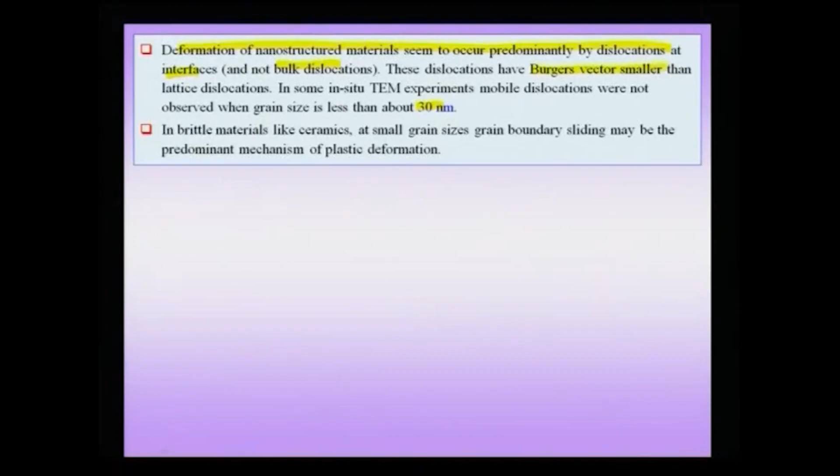If these dislocations sit exactly at the grain boundary, they seem to have a Burgers vector smaller than the lattice dislocations. In some in-situ TEM experiments, mobile dislocations were not observed when the grain size is below 30 nanometers. This confirms that in really small grain sizes like 20 to 30 nanometers, there is a paucity of lattice dislocations, and it is the grain boundary region which becomes important, both from the sliding perspective and from the perspective of dislocation activity.

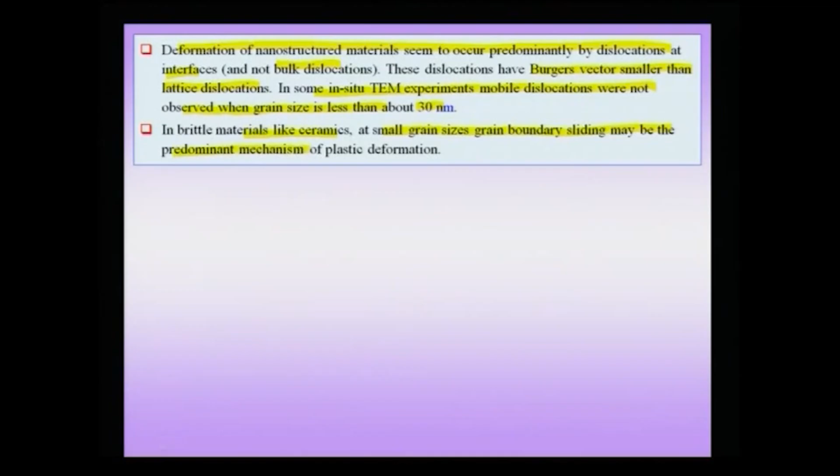In brittle materials like ceramics at small grain sizes, grain boundary sliding may be the predominant mechanism for plastic deformation. As stated before, the grain boundary is the region of activity, and in brittle materials like ceramics there is typically not much dislocation activity at low temperatures, so grain boundary sliding is expected to be an important phenomenon.

However, much more work has to be done to understand creep, superplasticity, and plastic deformation in general in nanocrystalline materials. We have already noted that in some cases the grain boundary structure is found to be similar to the bulk counterpart, while in other cases there is a difference between the grain boundary structure in bulk versus nano.

So what work needs to be done so that we can put creep and superplasticity on a sound footing, where we can talk about a broader class of materials under one umbrella with fewer parameters of understanding? In the case of creep, understanding rate controlling mechanisms at various temperatures and strain rates needs to be understood. Creep tests need to be conducted over a wide range of temperature and stress, and the stress exponent and activation energy need to be determined.

Grain size sensitivity needs to be determined by synthesizing materials with a wide range of grain sizes. This is a very challenging problem, not only because we want a wide range of grain sizes, but because we want close to monodisperse grain sizes as well.

Large strain steady-state creep experiments need to be performed, which is another area where a lot of work needs to be done. Pure materials should be used, because typically in multi-phase materials, which we have seen a few examples of, though there is an advantage in using them since grain growth is small, understanding the underlying mechanisms becomes difficult in multi-phase materials.

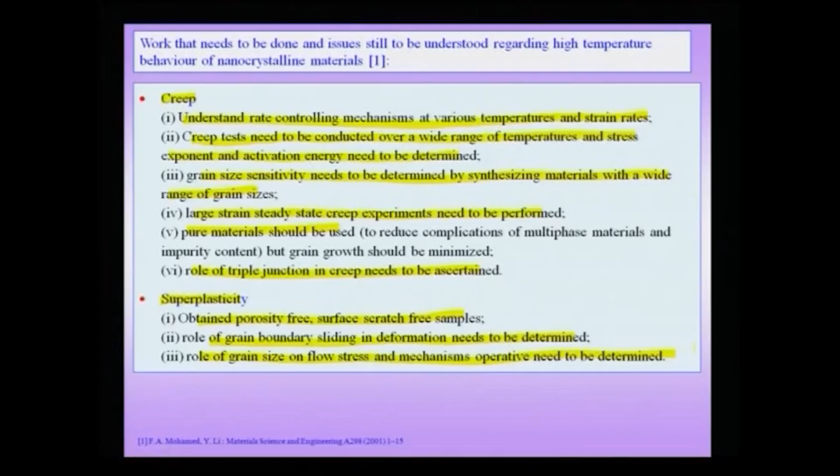So though we have briefly listed some of these factors, it is also clear that along with these we need to talk about additional effects, like artifacts which can come from the samples and processing routes, which always underlie these important effects that need to be deconvoluted, so that we can understand creep, superplasticity, and general plastic deformation of nanocrystalline materials.

So we will take up two case studies, two interesting examples of deformation of nanostructured materials or nanocrystals.

Going back to a very early experiment from Ajayan, he took such a carbon onion shell, without of course the gold inside, and put it under the electron beam of a 1.25 million volt electron microscope, and to his surprise he found that the core region of this carbon onion, so you have these nice carbon onion shells.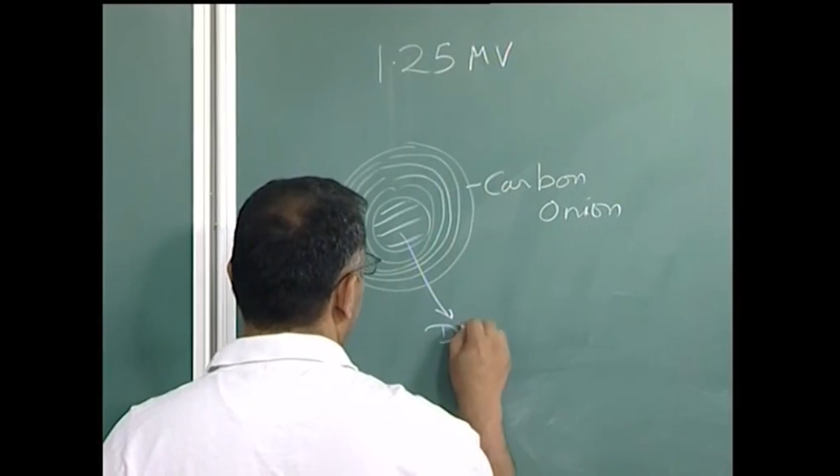So inside these are the carbon onion, or more precisely, this carbon onion here became diamond. In other words, under the electron irradiation and the intense pressure coming from these carbon shells, this interior of the carbon onion became diamond.

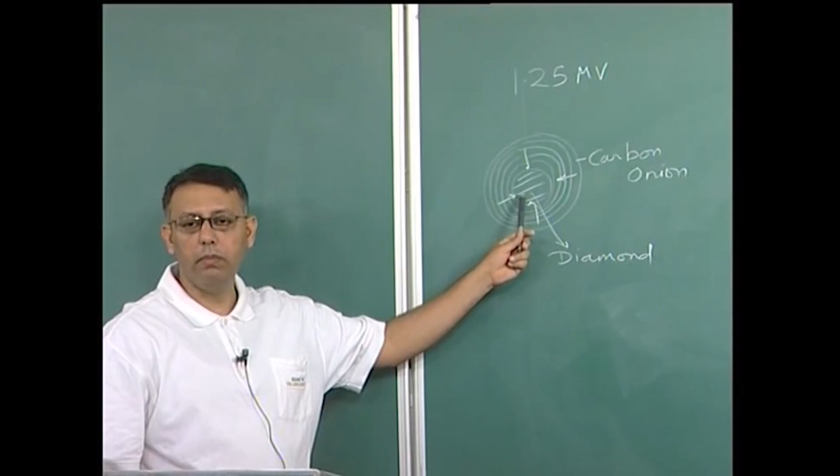This is a very interesting experiment which was published in Nature. You see that these carbon shells actually impose very high kind of compressive stress on the material inside.

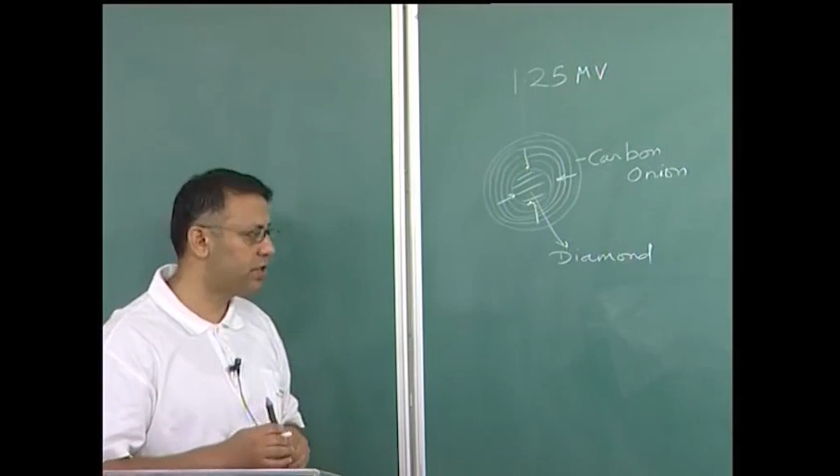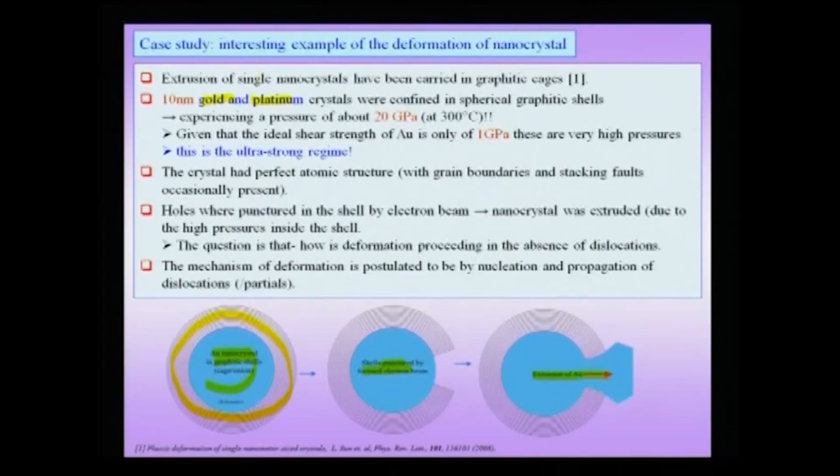This is a later version of this experiment, wherein this high pressure has been used for the extrusion of gold. In this experiment, what they do is take a carbon onion and then, using these graphitic cages, extrude gold or platinum.

The size of this nanocrystal is about 10 nanometers, which is present inside this - the blue color thing is about 10 nanometers - and this is a confined kind of nanocrystal. The pressure experienced at about 300 degrees Celsius is of the order of 20 GPa. This is extremely high pressure, which is what this small carbon onion cage is able to impose on this gold or platinum nanocrystal.

Given that the ideal shear strength of gold is only about 1 GPa, you see that this regime can actually be called the ultra strong regime, and therefore you are extruding or keeping the material in the ultra strong condition under this kind of carbon onion shell.

The crystal had a perfect atomic structure with grain boundaries and stacking faults occasionally present. So the gold crystal, when observed under the electron microscope, occasionally shows grain boundaries and stacking faults, but apart from that it is a perfect crystal, and because of this high pressure the lattice parameter is actually smaller than the bulk lattice parameter.

When holes are punctured by an electron beam, the nanocrystal was extruded due to the high pressures inside the shell. The important question is: if there are no dislocations in the material - you can see there are grain boundaries and stacking faults, but no dislocations - then how is deformation proceeding in the absence of dislocations? Is it a dislocation diffusional mechanism like creep that is operative here, or is it some other mechanism?

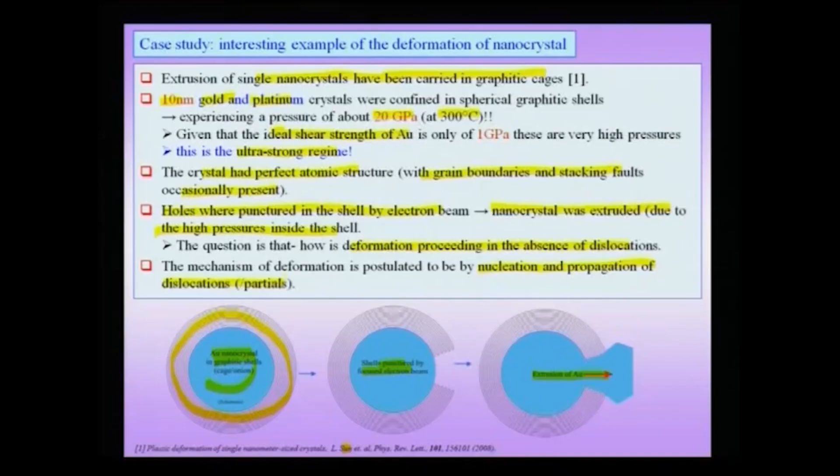The mechanism which the authors of this paper, Sun et al., proposed is that it is due to nucleation and propagation of dislocations, though in their transmission electron microscopy observations they did not observe any dislocation. They performed molecular dynamics studies and, in parallel, diffusion calculations to show that diffusional effects could be smaller, but you do see faceting of the crystal when it comes out of the carbon nanotube, and this faceting cannot take place without diffusion.

So diffusion is playing a role in the overall process, but they ruled out diffusion as the possible mechanism for this plastic deformation of the gold nanocrystal through this punctured graphitic cage. Instead they propose that it is the nucleation and propagation of partials or dislocations which is responsible for this kind of plastic deformation in the ultra strong regime of crystals, where the material is kept under a pressure of about 20 gigapascals.

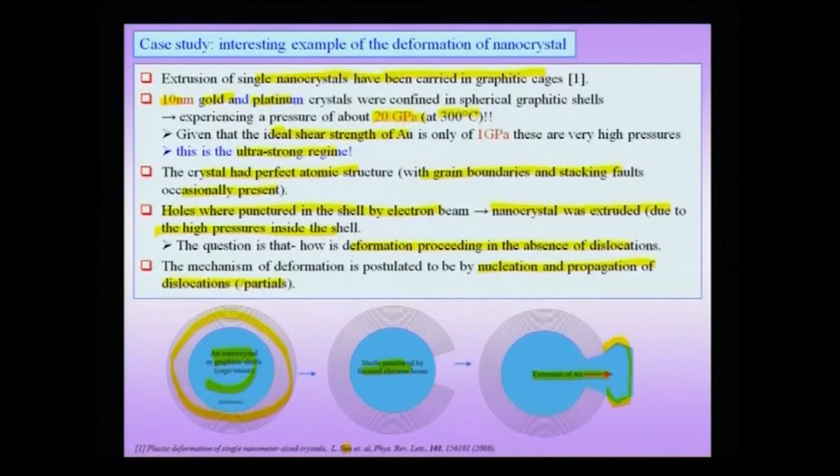So this is one nice example wherein a nanocrystal is placed inside a nano cage which is extruded by a nano hole. It's a very nice kind of experiment, and you can clearly see that the kind of pressures, the kind of mechanisms, and the experimental issues in actually observing some of these effects are very difficult - we have to do secondary computations like molecular dynamics to propose a mechanism like partials or full dislocations moving through the crystal and leading to this extrusion.

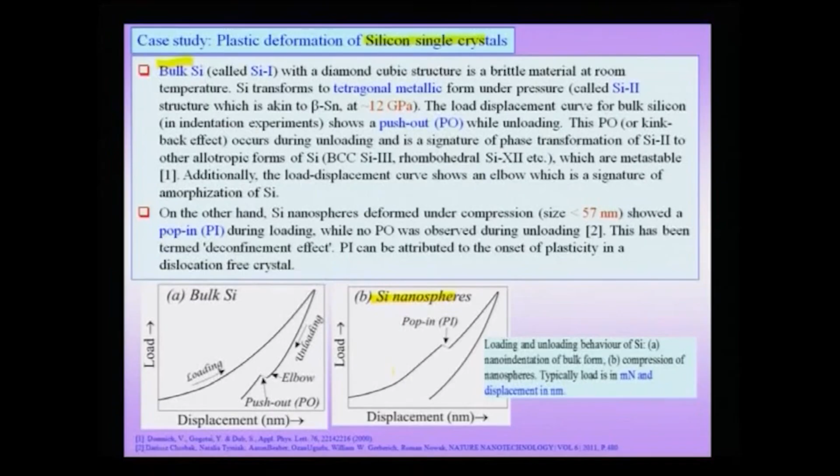In the second case is a case of deformation of silicon single crystals, and there are two examples we will take. One is bulk silicon, wherein there is an indentation experiment, and there is also a compression experiment of silicon nanospheres, and we will try to see the difference in deformation behavior between bulk silicon and, of course, the indentation experiment versus the compression of silicon nanospheres.

In bulk silicon, typically called silicon 1, which has a diamond cubic structure, we know it is a brittle material at room temperature. It actually transforms to a tetragonal structure under high pressure, which is what is experienced under a diamond indenter, and this tetragonal, metallic form is called silicon 2. This structure, the metallic form of silicon, is similar to the beta tin structure.

And we know tin is also found in alpha tin and beta tin forms, and not only is there a crystal structure transformation when it goes from alpha to beta, but there is also a change in the metallic character when alpha tin goes to beta tin. This transformation in the case of silicon actually occurs at a very high pressure of about 12 GPa.

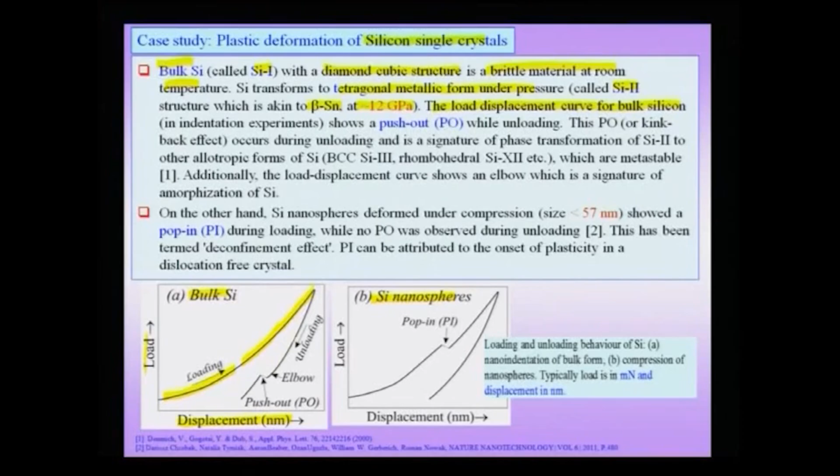Suppose I plot the load displacement curve for bulk silicon - this is load in indentation. This shows a very interesting feature. If you look at the load displacement curve for bulk silicon, during loading there is a nice smooth curve, but while unloading there are two important effects: the curve shows an additional effect called the elbow, meaning there is a curvature change, and additionally there is an effect known as the push out, or PO effect, observed only during unloading.

Now, what is the reason for this? This PO or kink-back effect, as it is sometimes called, occurs during unloading and is a signature of the phase transformation of silicon 2 to other allotropic forms of silicon. So silicon 1 transforms to silicon 2 under high pressures under the indenter, but when you actually unload, relaxing the structure, this silicon 2 transforms to other allotropic forms like silicon 3, which is BCC, or rhombohedral silicon 12 structure - metastable forms of silicon.

Additionally, this elbow part I mentioned is actually a signature of the amorphization of silicon. So some part of the silicon is also getting amorphized.

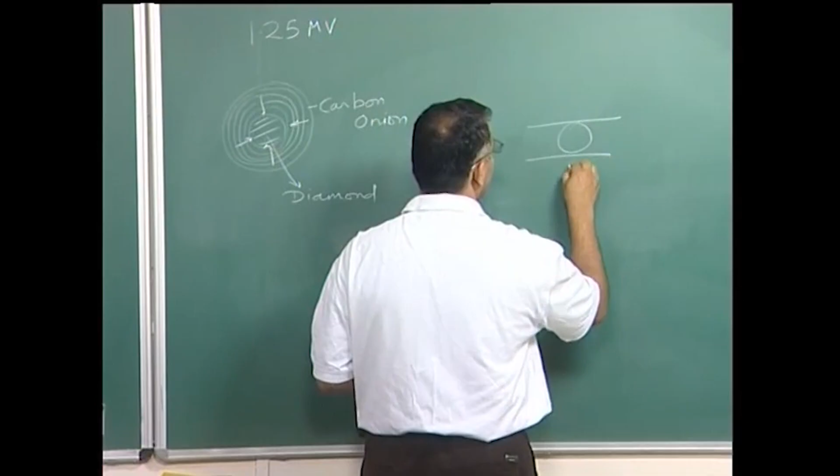Now, if you compare this bulk silicon indentation experiment, which is a deformation experiment, with deformation of silicon nanospheres - what I am doing here in the second case is taking silicon nanospheres and doing a compression experiment on them.

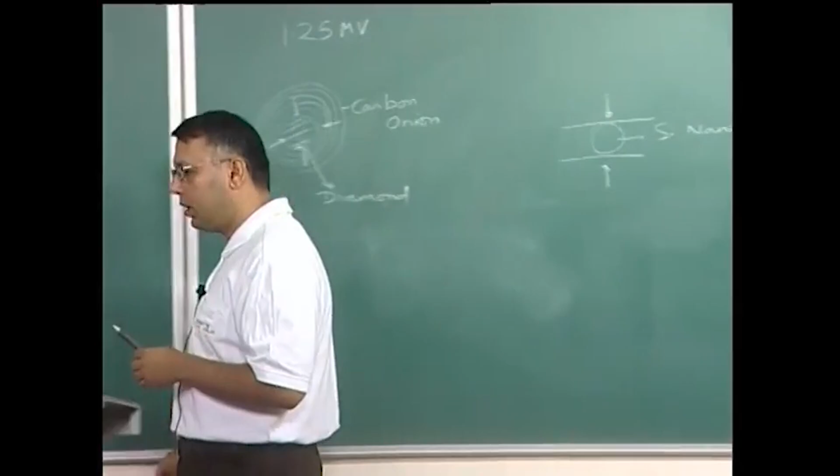In that case, you observe that the loading part of the curve, and also the unloading part, show a slight difference. In the loading part, you observe something known as the pop-in phenomena, and these nanospheres had a size of about 57 nanometers or smaller. But there was no pop-out, or push-out effect, which we had seen in bulk silicon - that part of the curve is smooth, there is no PO effect when unloading the silicon.

So the difference comes in the nanosphere case during loading, and this has been termed a deconfinement effect, which can be attributed to the onset of plasticity in a dislocation-free crystal. Clearly there is a very significant difference when loading bulk silicon in indentation versus compression of a nanosphere, and this deconfinement effect shows the onset of plasticity in a dislocation-free crystal.

It should be noted that in such experiments the load is typically in the millinewton range and the displacement is in the nanometer scale. These are very sensitive experiments done on silicon nanospheres with a lot of care, trying to see how deformation of a nanosphere differs from that of bulk silicon. You do see a difference, and the significant difference is in the loading stage of the curve.